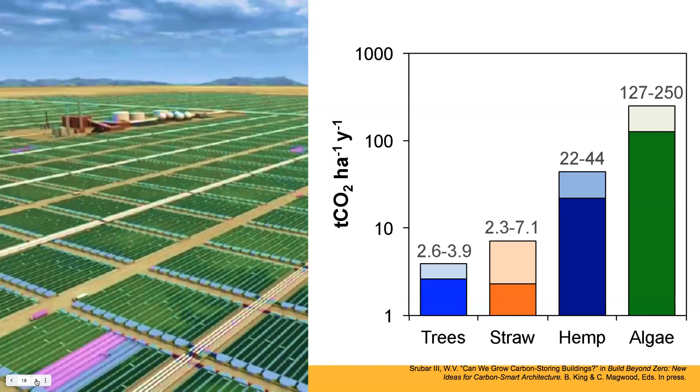Of course, forests create very strong, stiff materials, and algae is not necessarily that — it has to be transformed into other types of materials. But you can see clearly that all of these are natural mechanisms of carbon storage. The challenge is making sure materials derived from these raw resources are cost effective, and that we lock up the carbon fixed in these systems and in this biomass for decades.

We're not the only researchers thinking about algae systems and integrating those into buildings. If you do a quick Google search, you'll find other examples of integrating algae with building systems. Arup has done some work in this space, as well as other researchers around the world, especially those in Australia, who are really thinking deeply about this.

At this point, I want to shift to discuss materials that leverage the mechanism of mineral carbonation. A good material to highlight to facilitate this transition is hempcrete. For those not familiar, hempcrete is a hemp lime composite that carbonates over time. It takes the woody stalk of the hemp plant, grinds it up — it's called the shiv — and mixes that with a lime-based binder.

That lime-based binder then continually carbonates and mineralizes over time. So there are really two aspects of this carbon storage: one is in the woody stalk of the hemp plant, the other is in the CO2 carbonation of the lime.

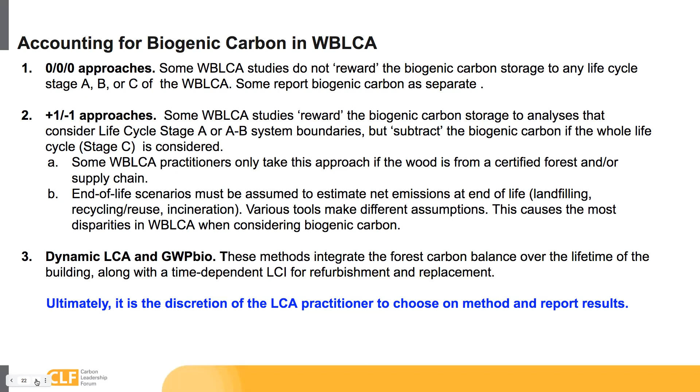My last point is that there are other emerging methods being brought to the conversation, including ton-year accounting methods or discounting methods that look at valuing the actual storage time, the time value of biogenic carbon storage. An advantage of these approaches is that it completely circumvents the biogenic carbon accounting issues I brought up. It's really just looking at the storage lifetime of the biogenic carbon in a building and assigning value and a carbon offset equivalency to that.

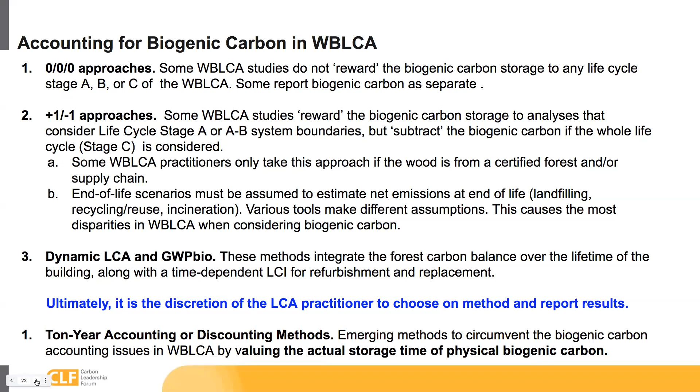Chris, I think you are muted. You are correct, thank you. And thanks for that lead in. It's always a pleasure to present with you and Julie, and I've certainly enjoyed the work we've done together.

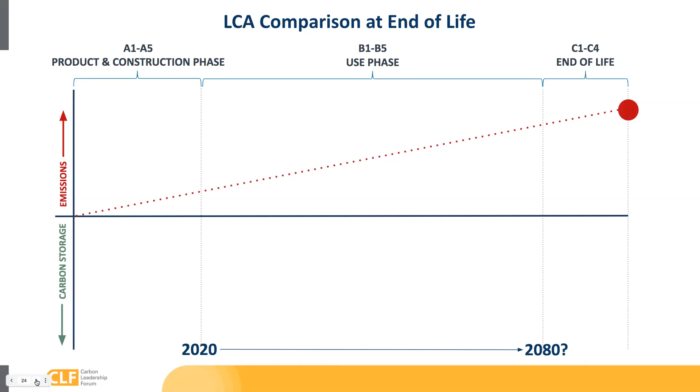I'm going to pick up right from where Will just left off, looking at mapping out what some of these carbon accounting scenarios look like. In the first one here, we're going to look at all three life cycle phases, A, B, and C. Essentially, the whole building life cycle assessment tends to come down to a number at the end of the building's lifespan. You calculate all the emissions from the very beginning on the left, and by the time you get to whatever the building's lifespan has been decided on, over at the right, there's a number that represents those emissions.

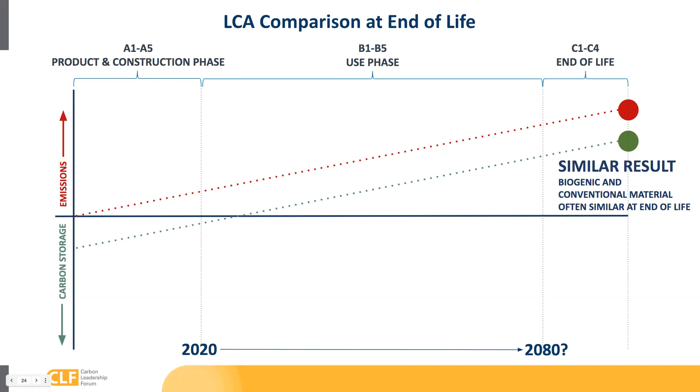As Will pointed out, with biogenic carbon, the line sometimes is straight, sometimes not, but if you look at the end of lifespan and the carbon was either accounted for or not accounted for at the beginning, and it's accounted for coming out at the end, we quite often see that the difference between a biogenic material and a conventional material often look quite similar at the end of the whole building life cycle assessment.

What I want to do is look at this scenario with the time value that Will was mentioning built in. Here we see on these red lines the steps of emissions that happen as materials are harvested, manufactured, transported, and the building is built. I've shown it as a static line, but there are probably a few jumps as materials are repaired and replaced, and then at the end of lifespan, some emissions from landfilling or some credit for recycling.

But that's how we end up at that sort of red dot at the end of the building's lifespan.

If we trace a biogenic material, the path looks really different, and there's a lot of difference that arises from tracing it this way. There's often a small burst of emissions from the planting procedures for biogenic materials, and then there's this period of photosynthetic drawdown. As these plants grow, they're pulling CO2 out of the atmosphere and using that carbon to essentially make themselves.

The length of time of that photosynthetic drawdown is going to vary a lot depending on the material. If it's a tree growing in the Canadian boreal forest, it could be 80 years. If it's grain straw growing in the American Midwest, it could be 3 months, or anywhere in between. So there can be quite a difference in time scale on that photosynthetic drawdown.

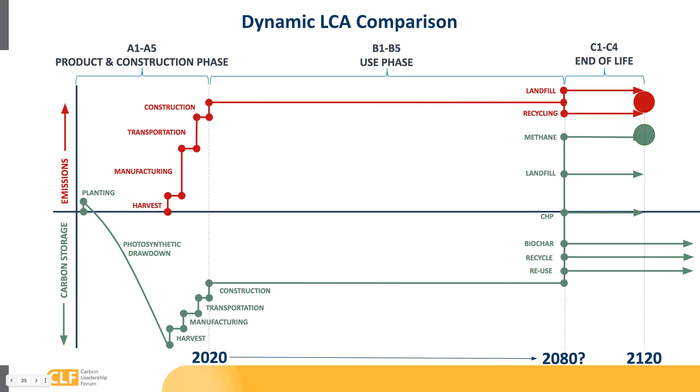And then there's a whole bunch of end-of-life scenarios we can talk about later. But what's important to note here for the climate — and we do want to make sure our life cycle assessment analysis is serving the purposes of the climate — is that these emissions on the conventional material have hit their peak at the time the building was built, and they remain in the atmosphere driving climate change for the whole time that building is standing. So really, it's the area under this line that is the climate impact, because those emissions don't just happen and go away. They happen and they stay in the atmosphere, year after year, continuing to trap heat.

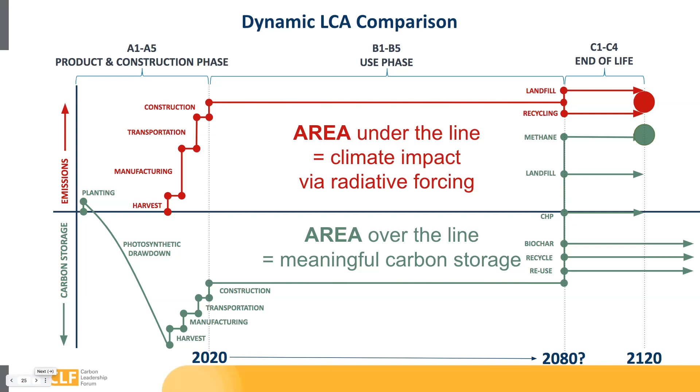Whereas for the biogenic material, it's that area over the green line, between the green line and zero, that is meaningful storage. That's CO2 that was not resident in the atmosphere over that period of time. So it's a very different look at accounting for biogenic carbon when you consider the value of that residency of either carbon in a building or carbon dioxide and other greenhouse gases in the atmosphere.

It's also important to note that even though we decide that a building's lifespan is 60, 80, or 100 years, the emissions are in the atmosphere for longer than that. They are gradually decaying, but that building will continue to have climate impact beyond the date that we set as its end lifespan.

Also, the emissions that are going to emerge from the biogenic material, even if they all come out and go back to the atmosphere, it's really the same carbon that came out in the first place. There's no net addition here — it's just putting the carbon back into the atmosphere.

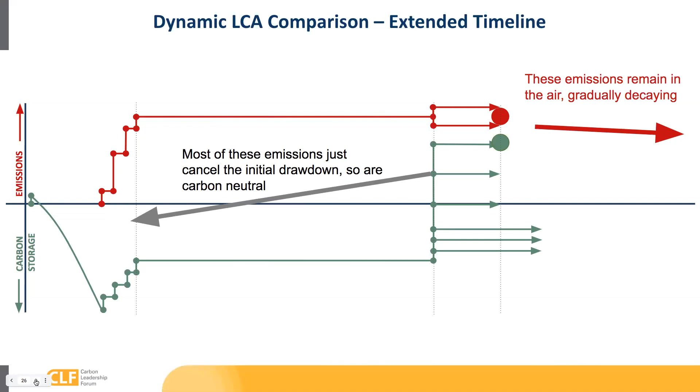Obviously we would like that to happen as far into the future as possible, by different ways of making sure that material stays in use, by being able to reuse or recycle whole building assemblies or biogenic materials. And at the end of even where we consider the building's lifespan, it's really just those A-level emissions that become additional at the end of the building's lifespan.

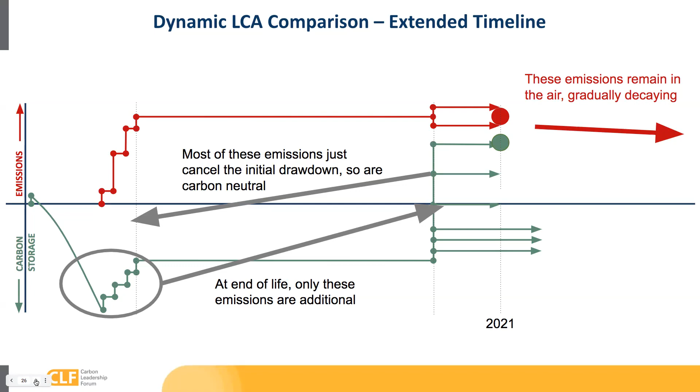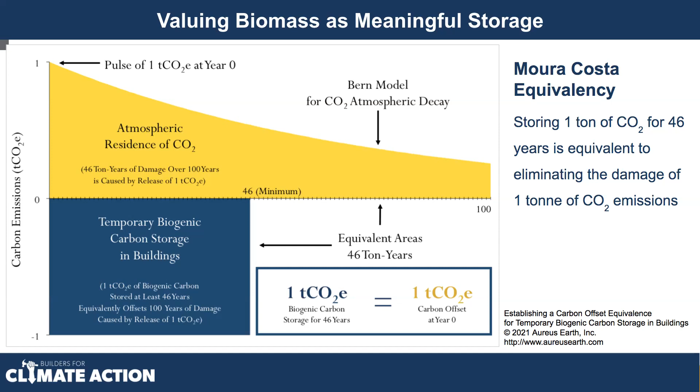So essentially, within the lifespan of a typical building, if we're talking about materials that would reside in the building over its entire lifespan, at the 46-year mark, the storage of that carbon has had the full meaning of taking a ton of CO2 out of the atmosphere.

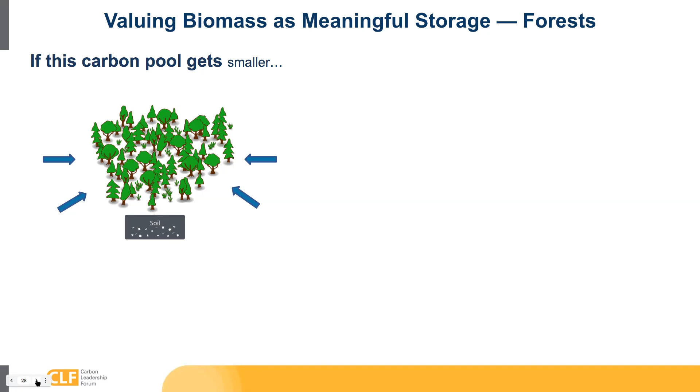Just a quick note on forest carbon. This is something the CLF has spent a lot of time on, with full webinars about it, but in general with forests there's a lot of external issues to consider. If the carbon pool of forests—the growing trees, the dead trees, and the carbon those trees put in the soil—is getting smaller in order to make the pool of carbon in buildings bigger, then nothing has really happened to the benefit of the climate. So the carbon stock in forests has to increase as our timber use in buildings increases, or counting that biogenic carbon as good for the climate may not be the right thing to do.

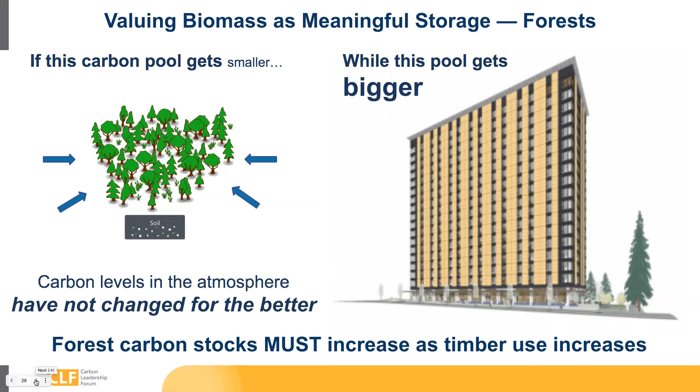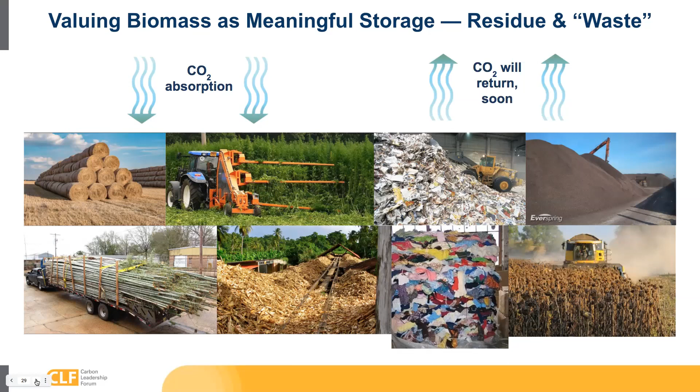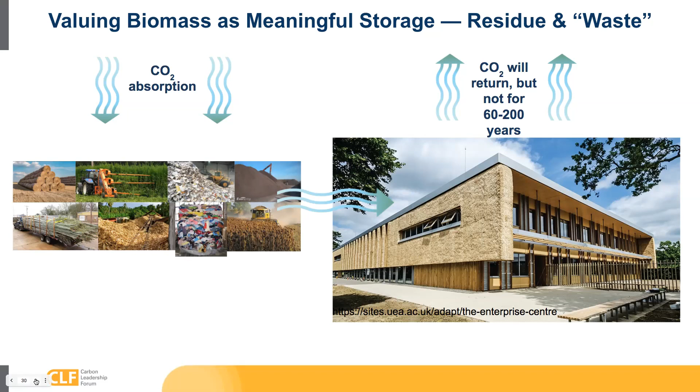What's of interest to us in this presentation is looking at all the other non-forest biomass that's out there to be used. For the most part, other than forests, a lot of this material has done carbon drawdown from the atmosphere, but it's very short-lived and will return to the atmosphere through burning or decay in quite short order. So we're suggesting that we interrupt that cycle by putting a whole bunch of that carbon into buildings for however long we can. If that's 60 years, that's great. If it's 200 years, that's even better. By stopping that carbon from going back to the atmosphere immediately, we provide a really important service on our way to fixing the climate crisis.

We know there are billions of tons of this biomass available for the building industry to use. A study done in the US, mostly looking at biomass for energy generation, but which could just as well apply to bio-based building materials, found anywhere from over 600 million tons to over 1 billion tons of this material produced in the United States every year that currently isn't being put to any other use. So the feedstock for biogenic building materials is quite well understood and documented, and there's a lot of it.

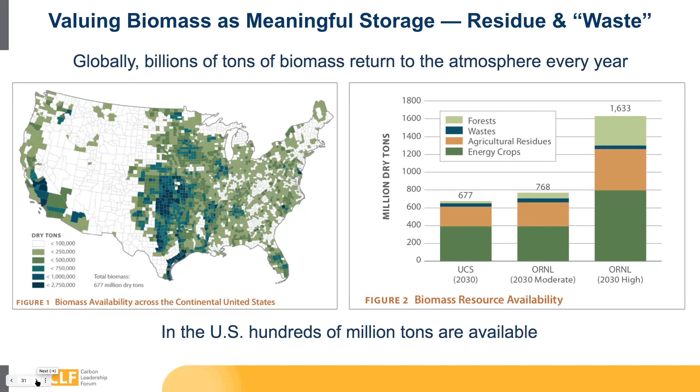To put that in perspective, globally there are over 2 billion tons of grain straw grown annually on the planet. We plant all this material, grow it, chop off the seed head at the top, and leave the stalk of straw. So the planting farmers are already doing is drawing 4 billion tons of carbon dioxide out of the atmosphere every year—withdrawing the equivalent of the GHGs from the country of India on an annual basis. But right now the vast majority of that just cycles right back to the atmosphere very quickly.

There are lots of ways that this one product can be used in buildings, including many companies making straw SIP panels for walls and roofs, using it as blown insulation, as compressed panels for interior partitions, as continuous exterior insulation, and as acoustic panels. In Europe in particular, the size and scale of buildings being done with straw-based materials is getting quite large, and it's exciting to see that progress—it would be great to see the same thing take root here in North America.

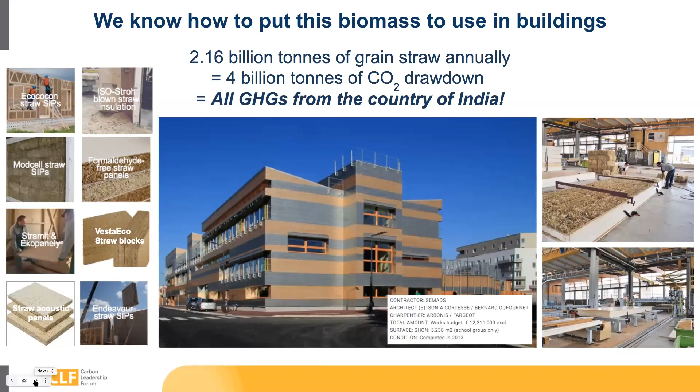I'll end by showing a case study of a building I was involved with here in Ontario, Canada, for Trent University. They needed a new forensic science lab and decided to make it an ILFI zero carbon certified building. The folks at Trent were also keen not to just address the operational emissions, which is the focus of that program—the building has about 46 kilowatts of solar on the roof and will meet zero carbon on the operational side—but they were really keen to look at it from the materials side too. So we worked with them to do an assessment of the materials.

This is an A1 to A3 study of the materials in the business-as-usual building they were going to build. This little 4,000 square foot building was going to have over 200 tons of CO2e emissions associated with its material palette.

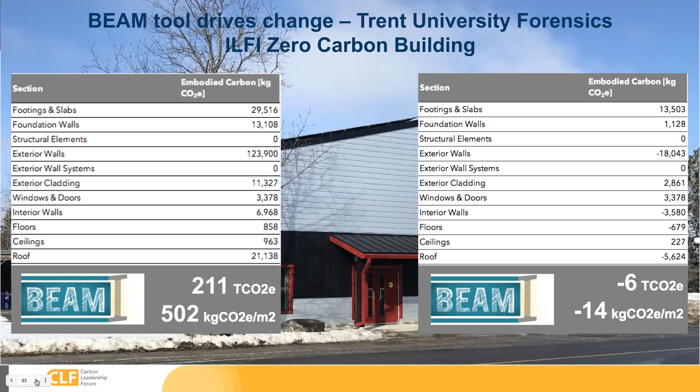After we worked with them on selecting as many appropriate biological materials as we could, we got that building down to the point where it actually had net storage of about 6 tons of CO2e. So over 200 tons of difference between the way this building was going to get built and the way it was built. This is just showing that these kinds of products and materials are out there today. This building was code approved and built and met all the requirements of a public building.

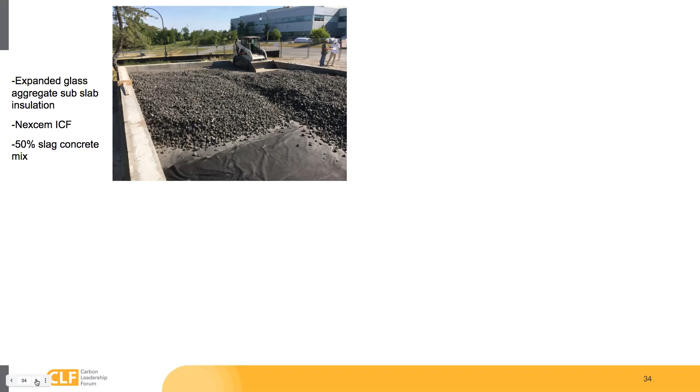Things we used included expanded glass aggregate as subslab insulation, which is not a carbon storing material, but is a material with a very low carbon footprint compared to other subslab insulations. A Nexcem wood chip ICF block, and a really high slag concrete mix in the foundation and in the slab. None of those things are biogenic or carbon storing, but what they do is reduce the overall carbon footprint of the building.

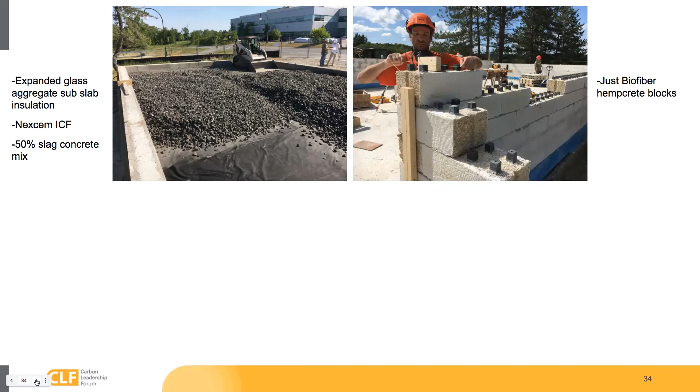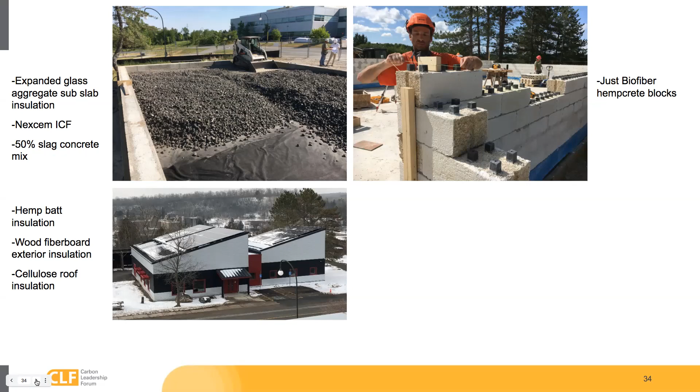Such that when we start adding materials like biofiber hempcrete blocks for the exterior walls of the building, hemp batt insulation, wood fiberboard insulation, and cellulose roof insulation, by the time we put those materials in, while doing everything we could to keep the carbon footprint of the rest of the materials as low as possible, that's how we got that result.

I want to also show you here that the result for this building, if we excluded storage value in the timber and the wood products, is just under 6 tons. So from 211 tons down to 6 tons, even if we're not including storage in wood, if we're only including the storage value of the agricultural byproducts and other waste stream materials in this building.

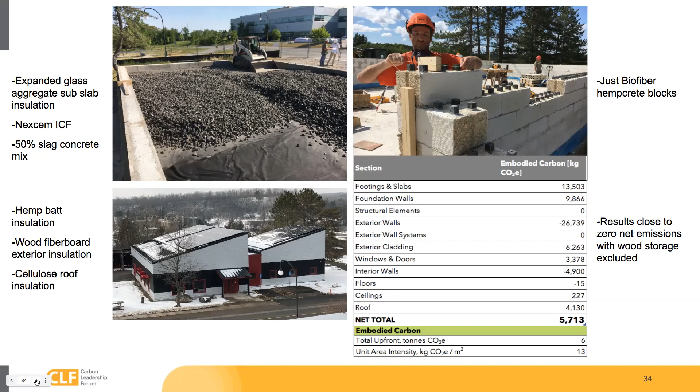So that, to me, it's really exciting. It shows that this is not a future dream, that we really could be making buildings that are close to or at zero or carbon storing right now today, if we chose to do so, and that the material options for doing that are developing quickly and well worth your consideration if you're in this field. And with that, I will turn it over to Julie to wrap things up.

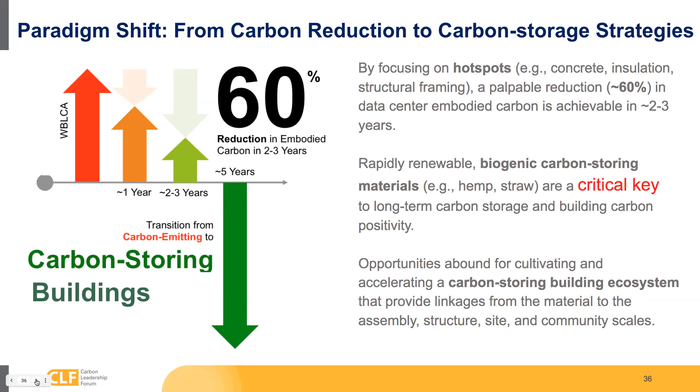Next slide, please. And where does that start? In order to accelerate this kind of change, what I found in my doctoral work, looking at what motivates people to engage at these different scales. So people are pretty reticent to change, and environmental psychologists have acknowledged that there's a lot that goes into it.

So if you can start a project by really investigating the values that people in the industry are bringing to the table, and investigating in terms of creating change, you can hold on to those values and hold on to that vision, so that the ideas that you have at the beginning of the design, business as usual, moving into this paradigm shift, will hold until the building actually gets built and then is there for its lifetime.

So on one of our projects, we've been looking with a company that is really excited to lead by example and dare to be disruptive. So that's like a first line item in our value system, our value structure.

They are interested in influencing materials production, so that's another scale, but really taking a holistic approach. How can what they do ripple out into our communities? How can what they sponsor, what they're interested in, holding those values and visions, impact surrounding communities, both locally and globally? That's really important in terms of being future ready.

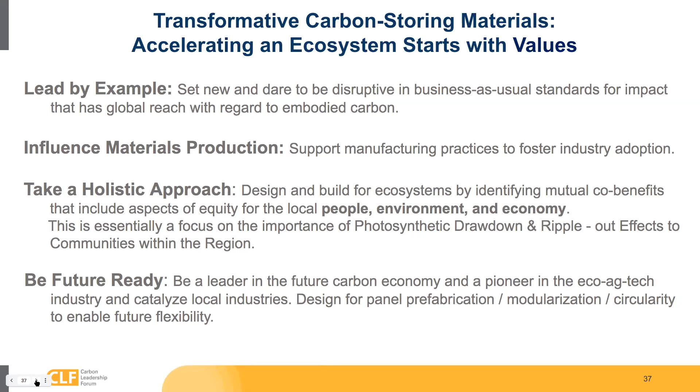So to be future ready, we need to be thinking not only about what we do here in one community, but globally, and then one design here that could be disassembled and reused. As Chris has said, if we can keep those materials within a building ecosystem, it stays flexible for the future.

One of the studies we're doing now is what we're calling transformative materials, where we're really trying to accelerate this process by bringing on and supporting new materials from the bench scale to prototyping to a pilot, and then beyond—strategies for beyond, and how that impacts the community.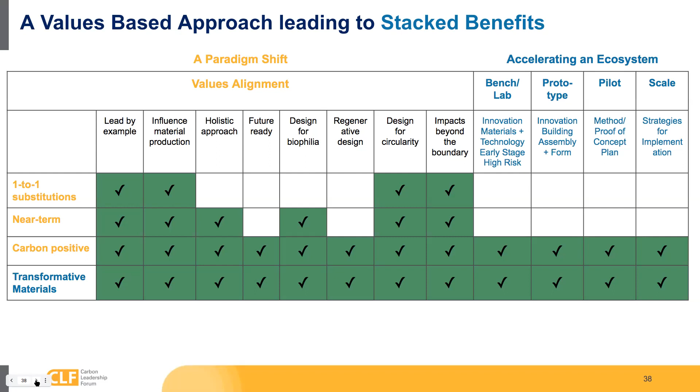You can see the bottom line of our graph here shows that we've really stacked the benefits from a perspective of moving forward based in our values.

This is a graph I always love to come back to. When you think about an ecosystem, it's really a system of systems approach, and the impacts ripple out into our communities. If you look at today, we can look at global materials and replace them one-to-one across regions, and there's broad applicability—not really a problem.

When we think about tomorrow, we're identifying materials that are tailor-made for existing or replacement of existing materials, and we feel that's going to come on board in 1 to 2 years. It's going to start impacting local socio-techno-economic conditions as new factories and new materials come on board. As that happens over the next 2 to 3 years, we imagine they'll inspire new hubs for manufacturing, and these materials will become more and more commonplace in the building industry.

That's when we're ripe to do what we call the quantum leap, connecting these different strategies and benefits—not only from an architectural or climate perspective, but also into the economies of where these materials that Chris and Will have been talking about are developed and grown. That kind of information can enhance local technologies, education, jobs, and housing.

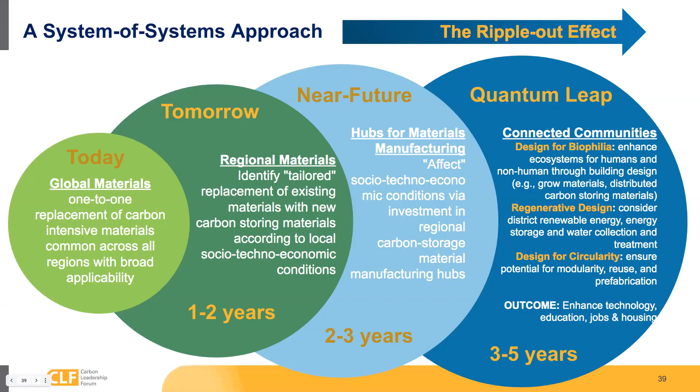This is a brief slide that talks about these ripple-out impacts. The current study we've been working on, which is on the CLF website, is called Carbon Storing Materials. The ripple-out impacts from that have included interest from new funding partners, from Microsoft to Google to Amazon to the NSF—the National Science Foundation's Sustainable Communities grants—and the 2030 Lever for Change finalists.

There's interest in all of these different ideas that we've been studying, researching, and developing over the last year. That has then led to a new study called Transformative Materials, where we're looking at going beyond—doing that quantum leap piece.

The ripple effect for that is really that we've been able to connect with different tribal nations and communities to see what interest there is in terms of building up new reciprocal relationships, where we can start connecting an urban-rural divide.

And then finally, a third project that is coming together looks at these pro-environmental values to understand the acceptance, the opportunities, and the barriers in using these different materials in multifamily and commercial office buildings—to really understand what values different industries hold, and work through them so we can actually get adoption and accelerate our ecosystem.